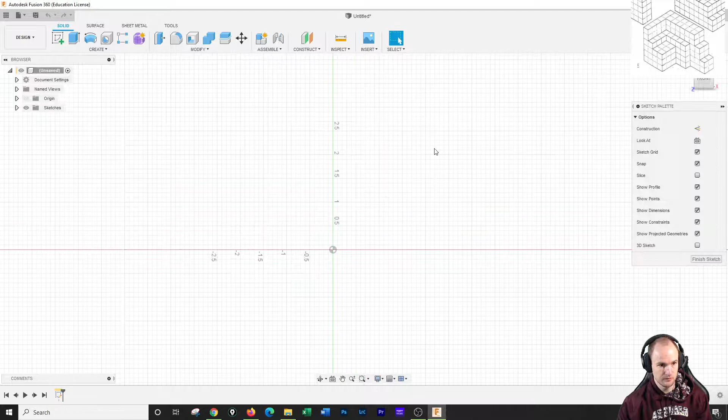Alright, so I'm going to draw the Tic Tac Toe board in Fusion 360. If I go to Design, we're good. I'm going to go to the front view and make a sketch right here on it. We're going to start out by drawing the Tic Tac Toe's front face on the front view.

So I'm going to draw this to be 4.5 by 4.5. So there we go, 4.5 by 4.5. I'm going to hit Finish Sketch.

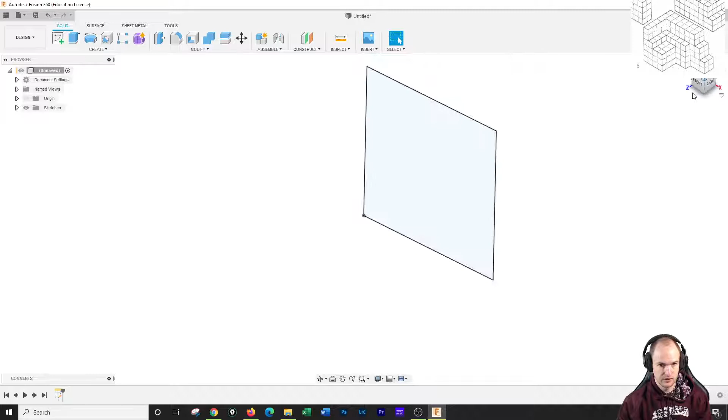And I'm going to extrude this to be 1.5 inches.

The next step is I'm going to put the holes in. So I'm going to select the front face here, and I'm going to use the point tool right here. I'm just going to drop this in someplace.

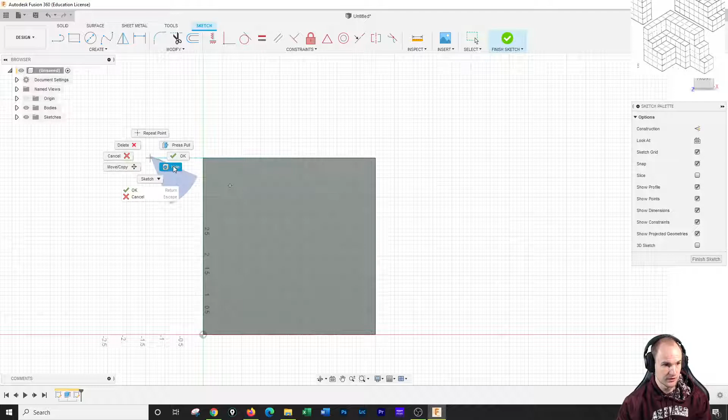And I'm going to dimension that point tool to be... oops, 0.75 by 0.75. I mean, sorry, not 1.5, 0.75 by 0.75. Okay.

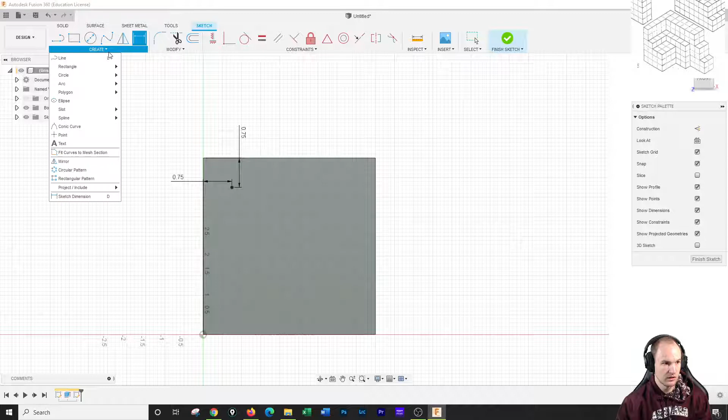And I am going to use the rectangular pattern on that point. So I'm going to select the point. I got the direction over here. I want it to happen 3 times at a distance of 1.5 from each other. So 1.5, 3 times.

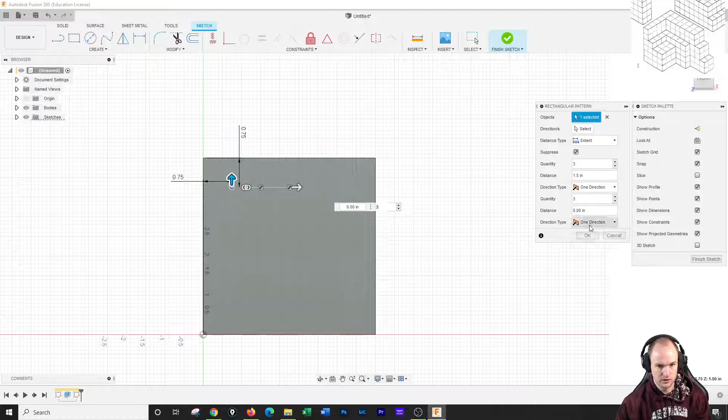And I also want it to go down, so I want the direction to go the other direction, so I got to drag the arrow down and over to my grid. So here we go.

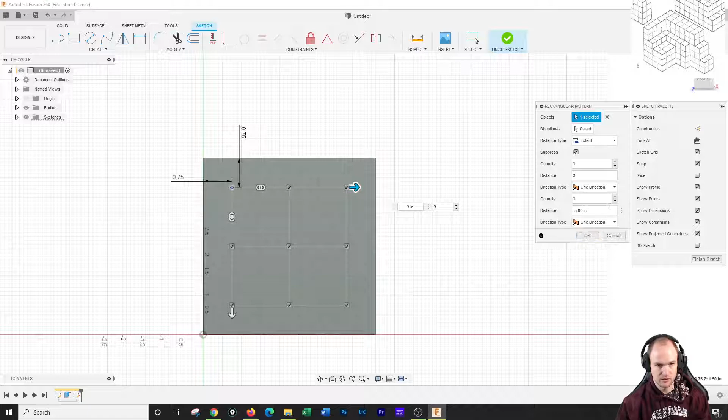So the distance between all of them should be 3 and then -3, because that's 1.5 and that is 1.5, which makes 3, which means this should be 0.75 and 0.75, hopefully. So I'm going to click OK. So I got my distance on this one is -3 and 3. This one is 3 and 3. And I'm going to click OK.

Now if I go to do a dimension on this, hopefully this will be 0.75 as well. Yep, so all those are 0.75. And then this will be good, so I can hit Finish Sketch.

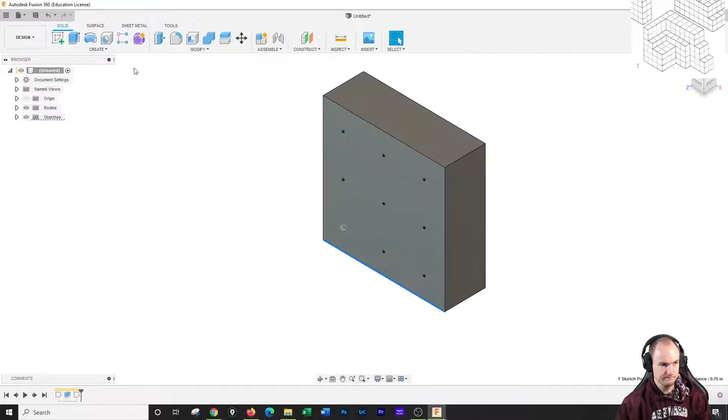I can make a hole on all of these. Now I obviously do not want this big giant monster hole that I am getting, and that one, so I got to do some editing over here.

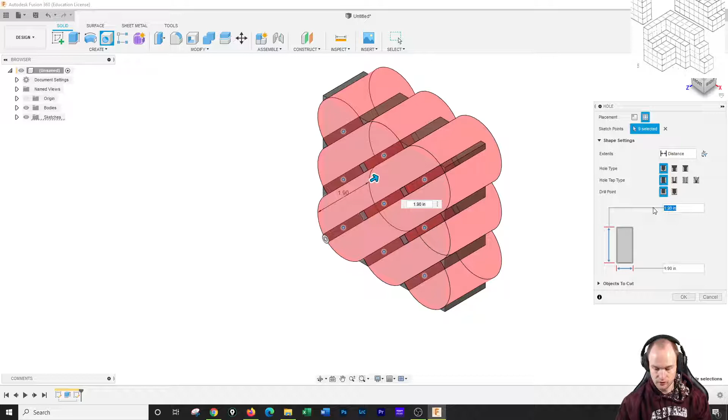So I want a simple hole. I want it to be a flat bottom. I want the depth of the hole to be 1/8 of an inch, and I want the diameter of the hole to be 1/2 inch. So I got some nice holes there. And I'm going to click OK.

So there are my holes, all set up nice. Okay.

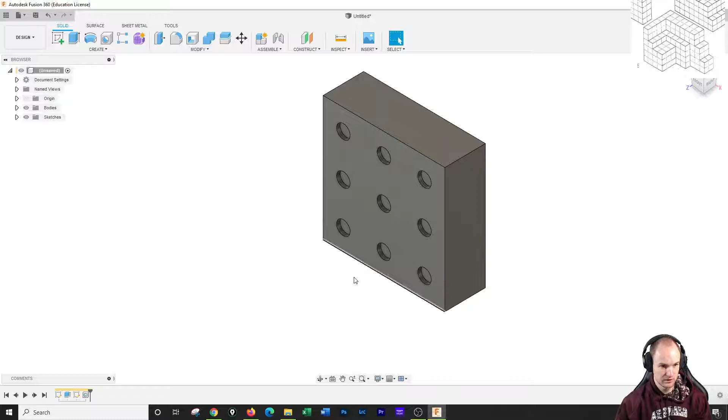The next step is I'm going to lay out the grid. So to lay out the grid, I'm going to make a sketch on the front face again, and I am going to draw one of the grid lines like that.

Now this grid line should be 1/16 of an inch, very tiny. And the distance from here to here should be 1.5 minus 1/32, half of a 16th.

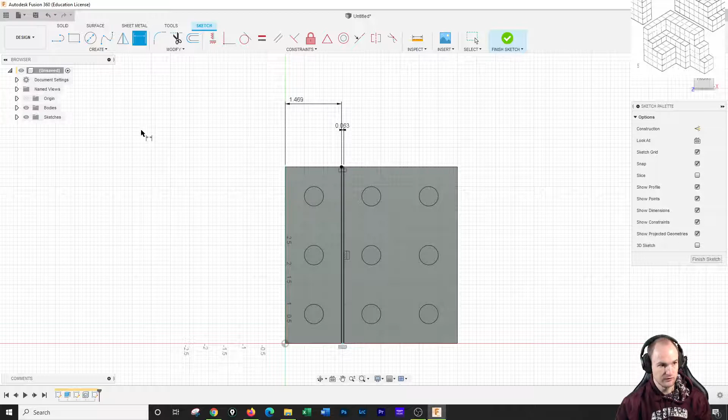So the center of this rectangle is going to be lined up perfectly at that 1.5 inch, which divides this into 3 equal sections. Okay, so after you do that, I'm also going to go to the circular pattern tool.

And I'm going to select my rectangle. I do not want these lines, so I'm going to hold the control key and click off them. I just want the rectangle lines.

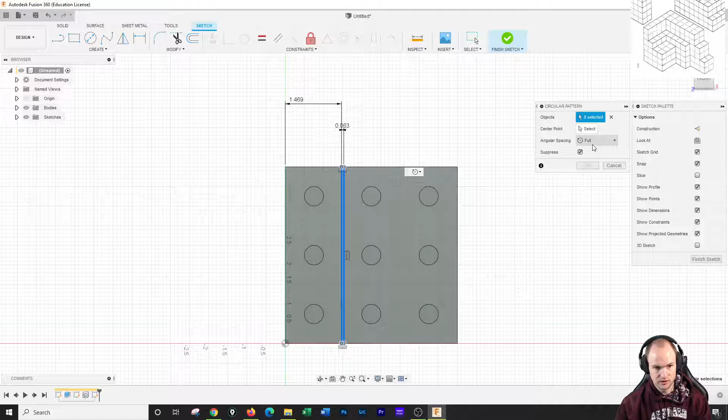And I am going to do a full rotation. And I have to select the center point, so the center point is going to be here, center of that circle. And I want it to rotate 4 times. Boom, boom, boom, boom. So rotated 4 times.

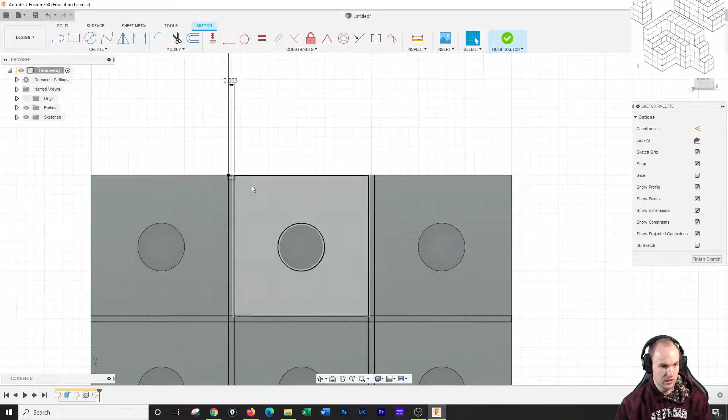And now I'm going to go in and I'm going to trim between here. Whoops, got an extra line there. Go back to trim.

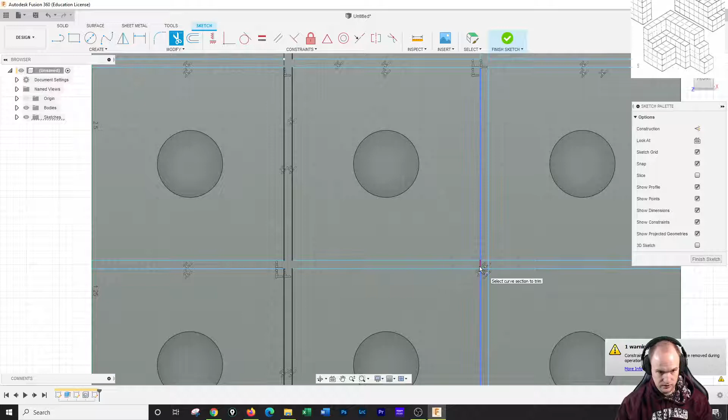I'll just take out all of these notches. Hopefully when I go to extrude this, it'll select it all at once. If not, I might have to add some lines up and down. We shall see. So I'm going to hit finish sketch.

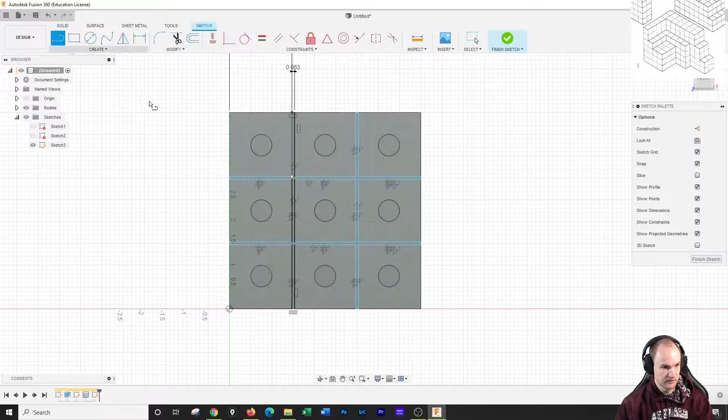I'm missing a line. I deleted an extra line, so I've got to go back to my sketch. I'm definitely missing a line from here to here. Finish sketch. Okay, let's see if this will select.

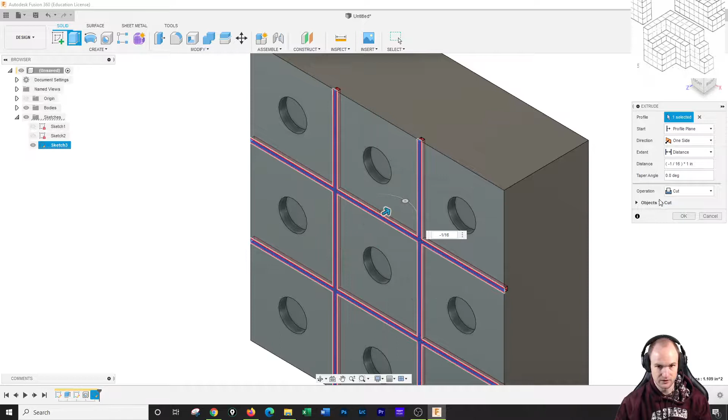That's always the big issue when you do this kind of thing. So it did select, and I want to go -1/16 down. You see it automatically switched it to a cut, so I like it. And then there we go, 1/16. So that's the Tic Tac Toe.

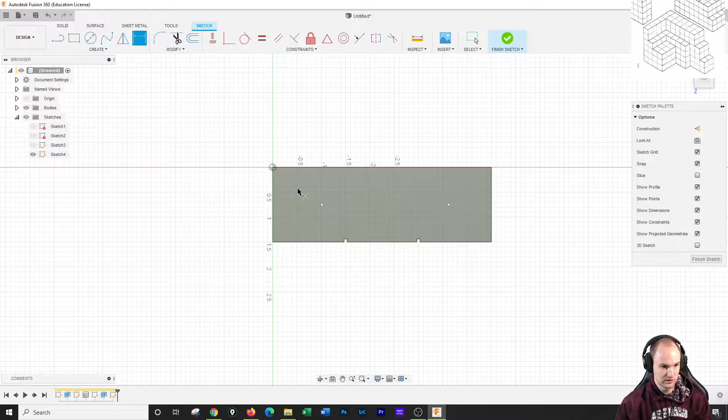On the top face now I'm going to add a sketch. I'm just going to use the point tool here to make 2 more holes. I want them centered, so I find the center mark. I'm going to set them each up to be 1 inch away from the edge. So the distance from here to here is 1 inch, and from here to here is 1 inch.

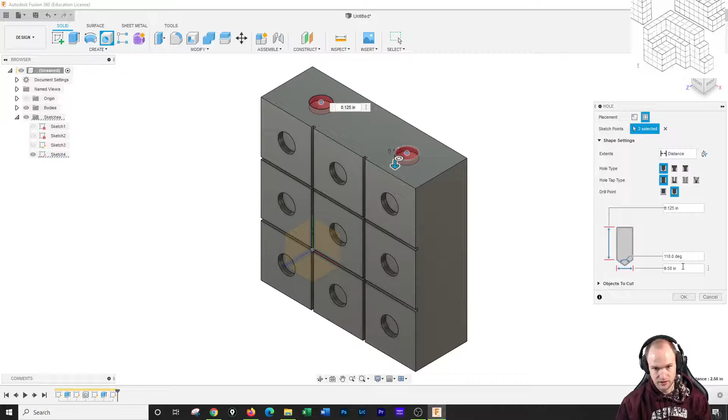I'm going to hit finish sketch, and I'm just going to drill a hole here. Once again, it's going to be a simple hole. I'm going to select both of those point hole centers. A simple hole - I do want to have a point to the bit, so it's angular. The diameter for this is going to be 3/4 or 5/8, depending on what your teacher says. And the depth is going to be 4 inches, so most of the way down.

After that, it's purely up to you, but I suggest you take the fillet tool and select all the exterior edges. I'm going to say you want to put at least a 1/16 round on all of these edges.

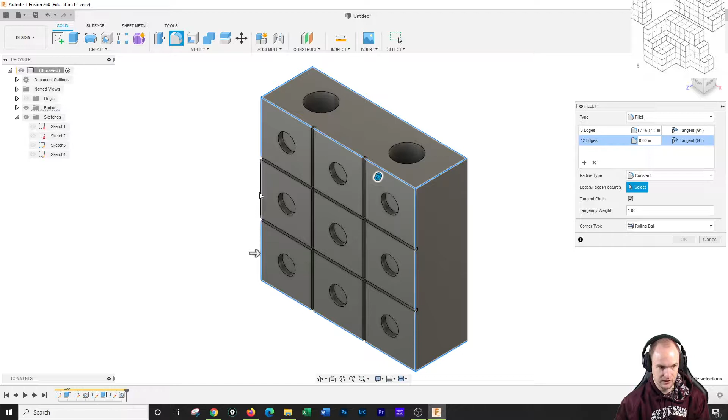I'm just coming around here. You should select all your edges before you input what they're going to be, because you do want to get them. You don't have to worry about any of the inside edges - that is not an issue. Spin this, I got that edge. That's good. Need this one, and that one.

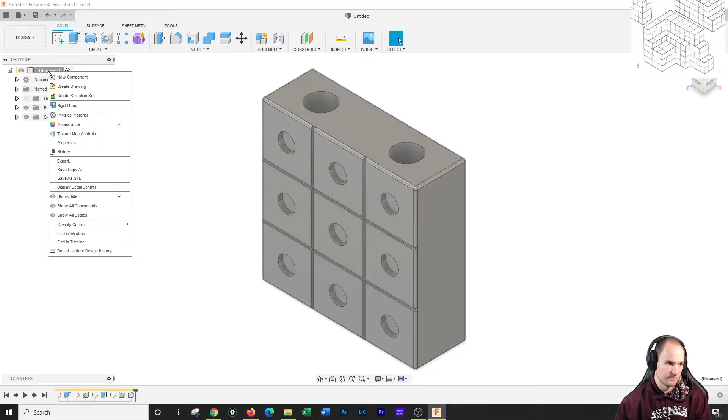Okay, and these are all also going to be 1/16. All right, I got all the edges rounded a little bit, make it look a little nicey nice. And then finally we've got our whole thing here. We can go to the top because it is a component, and we can go to appearance.

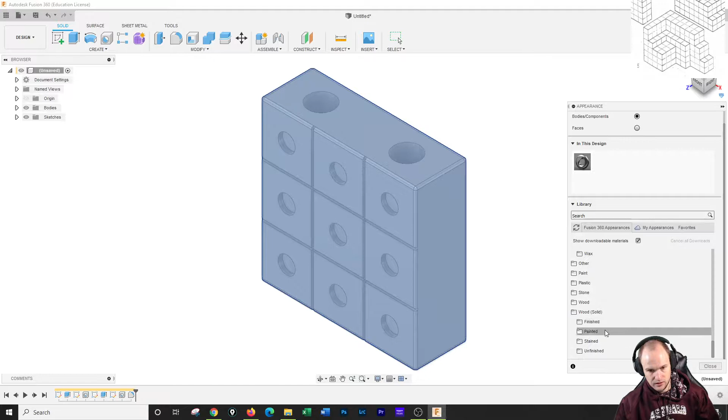And this is for the entire component, or even better yet, the appearance tab needs to get open. It was over here, it's closed. I'm just going to go down to appearance. I'm going to go to wood solid, and maybe just go to wood and see what we got. What do we got here?

A bamboo, ash is possible. Okay, so typically we make ours out of poplar, which is not listed, which is fine. So I would say ash is close in color, although not appearance. Cherry will be closer in appearance, but not color. So I'm going to go with cherry, and we'll say we stained it.

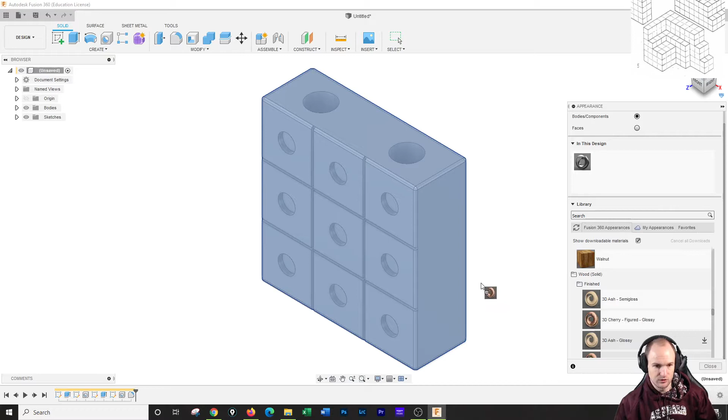So you can just drag the cherry up to the top. Doesn't look like cherry I've found in the wild, but that's okay. It's got a nice grain. And you are good to go with this portion of the tic-tac-toe. So there you go, tic-tac-toe.